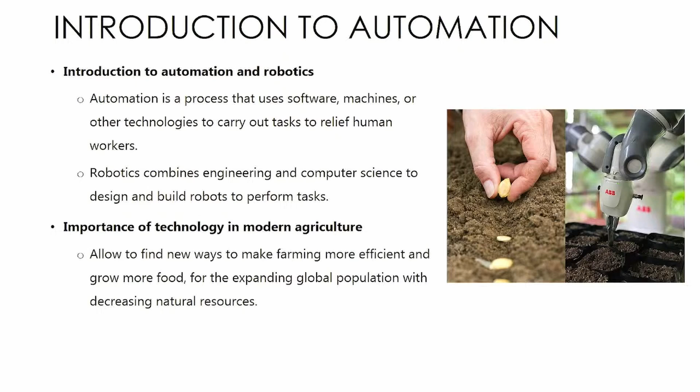In terms of this, the importance of technology within agriculture is vital for the industry, vital for the benefit of the country, vital for the benefit of society itself. The reason is simple. If we have a good supply chain of food that's reliable, we might be able to reduce costs to the end consumer while increasing profits to the farmer. This is one of the biggest objectives that robotics in agriculture is trying to achieve.

Of course, it could be seen that we want to reduce the amount of people working on picking, but this isn't necessarily true. The reality is that people on farms are very difficult to find. Pickers are extremely difficult to find now, because people are more educated, they want other jobs, they want to stay in the big cities. So through automation, the people hired for this type of work will be doing something else, like managing the robot fleet, supervising other activities, and also having the possibility of better salaries. This is what's actually happening in the industry.

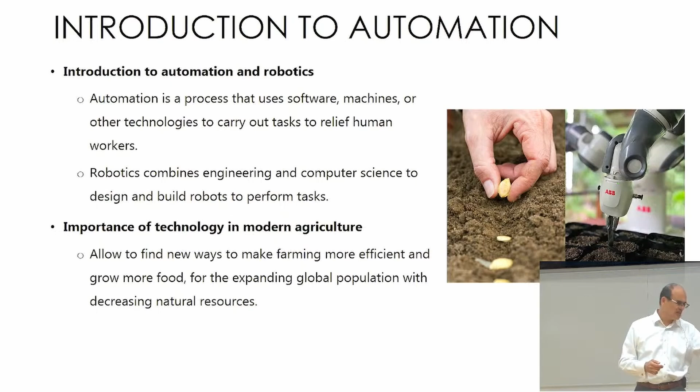This is very similar to what's happening in the warehousing industry now. They have fewer people picking stuff within warehouses, and more robotics, meaning people have something else to do. This is another use case that's been disclosed and published by Amazon, I think. They've done something about it in terms of defining the use case.

In terms of robotics in farming, the intention is to streamline the process, to ensure that with the use of machinery we can facilitate and reduce the crop that could potentially be left too long in the plant. Strawberries, raspberries, blueberries, etc. - if they stay too long they get too ripe and need to be thrown away. That's another issue with productivity, so if we can pick the fruit at the right moment, we can reduce that.

But of course, through the use of automation we might also be able to detect any health issues of the plant in real time, react and advise the farmer that something is happening with the plant, so the farmer can identify the problem and go through the process to spray chemicals or kill the weeds. So this is what we're looking into, trying to get this technology to improve these issues.

So in terms of robotics, let's say machines, we've got tractors, logistic machines, drones, harvesters - we talk about precision agriculture. There are other companies that, for instance, are doing yield prediction.

For yield prediction, they go through the field and identify, in a vineyard for instance, how big every single vine is with all the grapes and so on. With just vision, it's able to detect how big it is, calculate or estimate the number of grapes, the weight, and the maturity level, right?

And then report it back to the farmer. So the farmer can say, yes, we can pick this area, we'll wait for next week for this one, or two weeks for this one. So that helps with the logistics. This is another area of robotics that many companies work in.

In terms of precision, we were talking about RTK, which is a flavor of GPS. I don't know if everyone knows what an RTK system is - it's real-time kinematics. Basically, it's a correction between a GPS base station that's stationary, and a rover with another GPS. Both communicate with each other, and both at the same time see the satellites on the constellations.

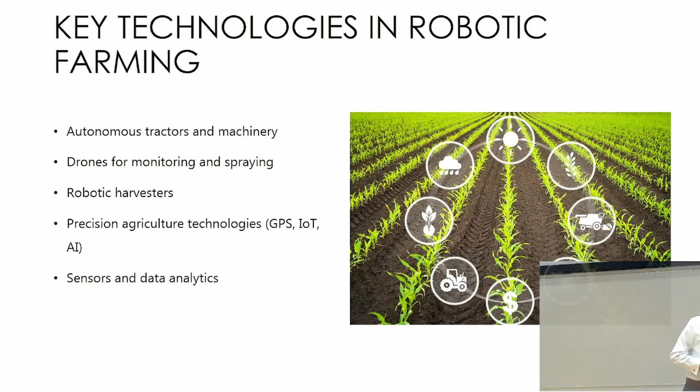So, benefits. Let's look into benefits now. Of course, the benefit we mentioned before is increased productivity. The more productivity the farms can do, the more they can sell, the more profit they can have, and of course the more people they could potentially hire as well.

Productivity is important. There is, of course, the reduction of labor costs. If we optimize the number of people working on farms, not necessarily hundreds - we're working with a farm that at peak season has about 1,200 pickers. And seasonal workers work from March, April to October, November, depending on the crop, so it's pretty much the entire year.

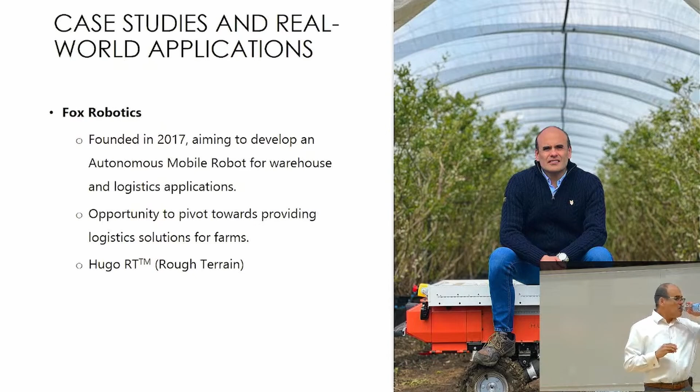In terms of case studies, I'm going to introduce my company, Fox Robotics - that's me. This is a robot, Hugo. Hugo is an autonomous machine. This is our generation 2; we've got generation 3, I'll show you in a second. I founded the company in 2017, and the intention was to work only in warehousing when I started.

So we started building a robot, very small, floor level, just for warehousing. During that development process, I met many farmers who have warehousing, polytunnels, and open fields. They asked me the same question: can you do this but outdoors? That was the pivotal moment - some of you remember that. So we started working on what we could develop.

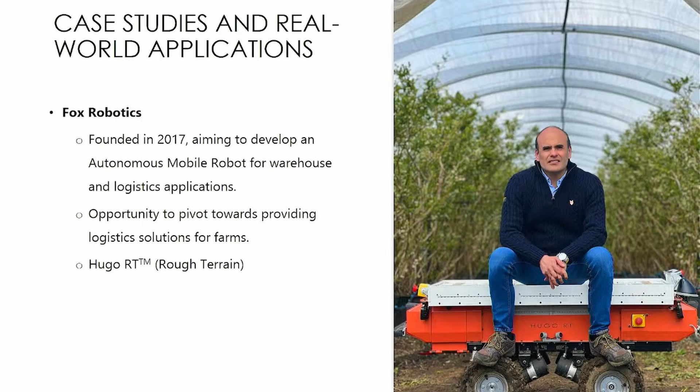Our first generation of Hugo had many problems - suspension issues, navigation issues, everything. So that's gone. The second generation is this machine here; we solved many mechanical issues, though we had some issues in other areas that we resolved. Our generation 3, I'll show you in a second, solved most of the problems, and we are now in commercial trials.

Of course, we looked into our solution - basically our initial use case is logistics, but we have many use cases. The first part of the solution is the pickers on a field, on a polytunnel, let's say 400 meters inside the tunnel, and the picker is picking. They have a small device we call HolaHop.

They press a button that sends a GPS RTK location to the cloud and to a robot. The robot says, oh, I've got someone else who needs me. That information is collected and sent to the robot, which will autonomously navigate based on a specific predetermined map we build, identifying the best route. If the route is blocked by an obstacle - a car, a van, an animal, whatever - it reroutes and calculates the new path.

So the robot goes to the picker, who puts the produce there. It captures the picker's information with an RFID - who you are, how much weight you put on the robot. That's data. Remember we talked about farmers capturing data on paper? Now we get it autonomously on the machine, and we send it to the farmer in real time. That's a benefit for them - in real time they see which is their best picker, which is their worst picker, what they can do to improve that picker, and whether that row is producing enough.

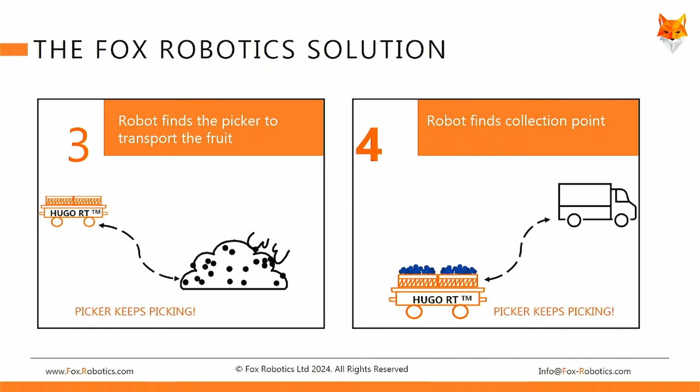So by doing this, we reduce that percentage that we were discussing a moment ago of queuing, walking, transporting, and other activities and capturing data to higher output and productivity for the farm. So this is one of our use cases that my company, Fox Robotics, is working on.

So we got some use cases. Our robot HugoRT is being designed already to do many other activities. It's a platform, like a Lego. You put whatever things on top of the robot. You've got many connectivities, many I/O ports and so on, so we can do lots of stuff.

So we can do towing. That's a mechanical link, a mechanical connection. This small robot has a capacity of about 600 kilograms towing. Quite a lot.

But you can also mow. We're working on adding a mower to the robot. Farmers in polytunnels need to mow every week or so because the plants grow too much. The micro weather created by polytunnels increases the growth of weeds and grass, so they need to mow.

Generally, they do this with a person using a van, truck, or buggy, and just the act of moving this motor device with a mower pollutes the fruit because the exhaust affects it, somehow sticking to it. So if we use something electrical, there's less pollution, meaning the fruit has more quality. So this is one of our things.

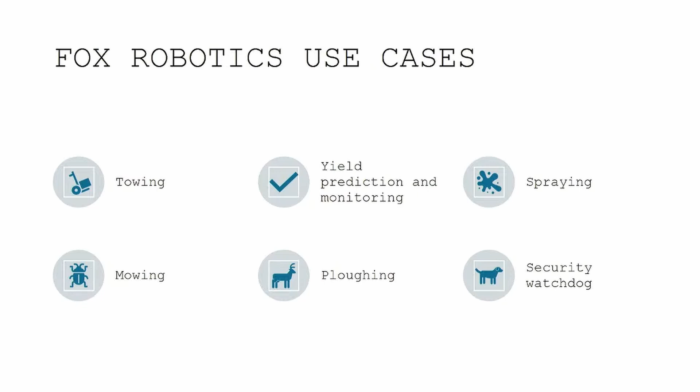We've got many more use cases for our machine.

Now, in terms of safety standards, before we go to the next use case, there are many safety standards. Safety is something very important in robotics. If we want a device that's compliant with the law and safety regulations, this is just a small extract of safety standards. These numbers probably don't mean much to you, but there are safety certification systems and standards for electrical systems that have to be specific to ensure you don't kill someone because of a voltage in the wrong place.

Safety machinery isn't just about putting up a safety stop red button. It has a design, a category—PLD category 3 or category 4—depending on the machine, the voltage, how big it is, how fast it goes. What's the stopping distance? If you go 3, 4, 6, 10 miles an hour, what's the maximum distance you can stop before killing someone, breaking a bone, or smashing or pushing someone to the floor? All these considerations are in specific standards.

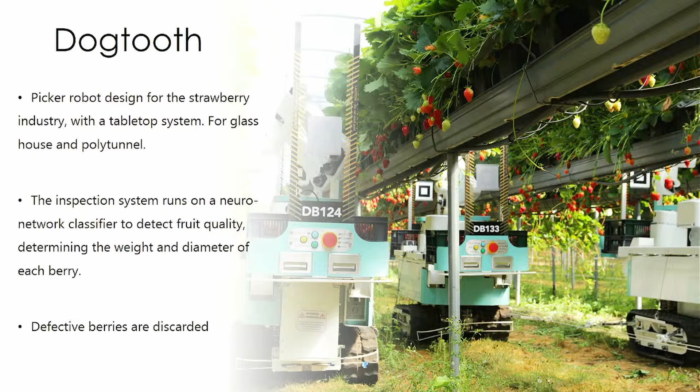If not, it's discarded. That's their core IP, but they don't do navigation. This machine is not autonomous; it doesn't navigate. What they use is a wire and an operator—they position the robot in the right place, connect it to the wire, and let the robot run on the wire. It doesn't go autonomous. So this is one thing this robot doesn't have, and it's another secondary use case.

Almost finished—as conclusions for this first part, before we go to Q&A: the key point is robotics is here to stay for agriculture. This is the next generation, the next revolution in agriculture. It will facilitate and increase productivity and quality, reduce costs for farmers, increase profit, and create new jobs, totally different ones. There are more robotic companies than before, and AI will also be included.

And of course our companies are looking to work with more university partnerships. With the University of Surrey, we are working on a grant—Surrey University and Fox Robotics working on navigation. We have our own navigation stack, but Surrey University is adding part of the IP into our navigation stack.

Questions? I can go technical if you want. Just a question about the vehicle you've designed, the latest one—a technical question. Presumably it's got sensors on it to identify obstructions it might come across on a farm, of which there are many. What are your sensors based on?

So what else? Is there a problem at night, because obviously farmers work? At night, our robot... I got a picture of the robot somewhere. Oh yeah, this one. Our robot has lights on the sides, right? You got floodlights that send enough light to the cameras so you can navigate.

But of course, you also have navigation. You got the RTK that allows you to position yourself. You got IMUs that are able to identify your heading, your orientation, and XY coordinates. So that determines the orientation of the robot. So we got more stuff.

I assume that within any one farm, all this robotic machinery communicating together, and the cloud bringing the data back, all sits within one big security perimeter. So what do you do if you get a denial of service attack coming in? What do you do to keep yourself secure?

Good question. Yes, so one of my skills is I'm a certified ethical hacker, right? So in our case, we put controls in place to minimize the attack vectors from a threat actor.

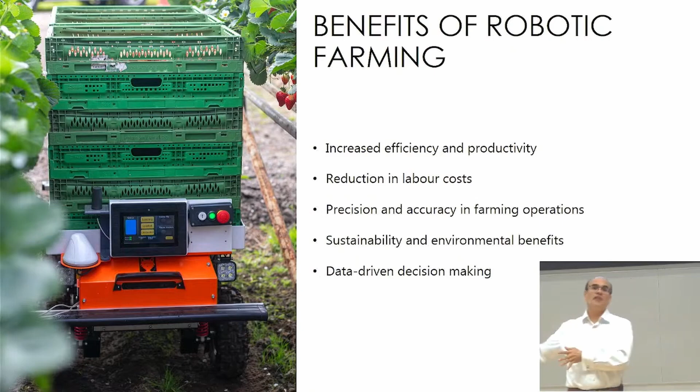At the moment, most robotic systems are not integrated with other manufacturers. So a robot from company A doesn't talk with robotics from company B. At the moment the industry is like everyone is in its own silo. In our case, we have defined and put in place controls that reduce your attack vector.

Denial of service attack is very difficult to prevent because it's just a flood of TCP, UDP against ports that you have open, right? Just trying to steal your services. That's quite hard, but there's some control that you might be able to implement.

Vulnerability scanners or port scanners, that can be done. You can add firewalls just to reduce the number of ports open to the wild. You can, for instance, have firewall configurations with IP to IP source destination, port destination already defined, so you reduce who's going to connect.

But also there's many standards, ISO 27001, in terms of controls for cybersecurity. You have other infrastructure designs, like the Purdue model. The Purdue model is oriented towards OT systems, operation technology. It's the way you define and layer your components, so you might be able to layer your internal robot infrastructure into layers and protect them.

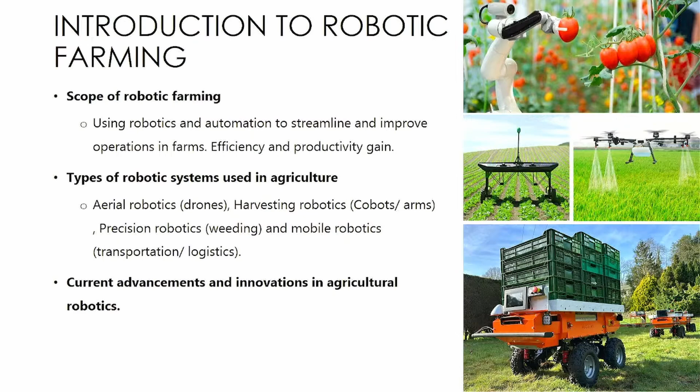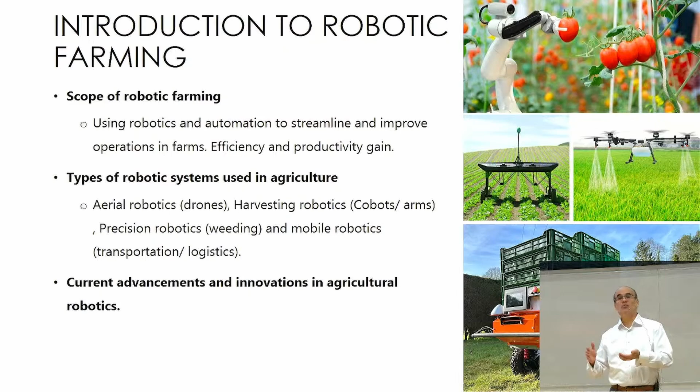During the winter period, when temperatures are lower, perhaps there's not a lot of agriculture actually going on. So what do the robots do? Do they just sit in the barn and wait for the season to change, or are you mostly targeting places where it's a 24-hour operation, sort of glass house type cultivation?

We work with farms across all the spectrums, from glass houses that are pretty much working from February to November, to open fields, tunnels for open fields, that is from March, April to September, October, or polytunnels that also run about the same time.

In winter time, farmers are still working because they need to prune, transport, and take out all the plants that died. All this manual activity can be assisted by the robot. Yes, the robot will be able to remove dead plants, but one person with the robot will just go and put it in a trash bin with wheels - an intelligent trash bin, let's put it this way. So the idea is to maximize the usage of the robot. The more you use this kind of technology, the better ROI you'll have.